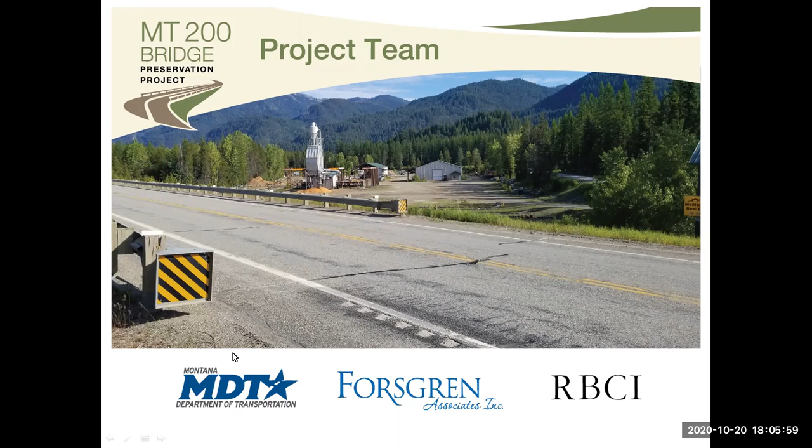All right, hearing nothing, I will move on to a little bit of an overview about the project.

MDT on this project is evaluating the bridge on Montana 200 that goes over the Montana Rail Link about 2 miles south of Noxon. This bridge was constructed in 1957 and is in need of some repairs and routine upkeep.

MDT tries to keep the best return we can on our investments. This is kind of like the 100,000 mile checkup, if you will, on your car. We're going to do some needed maintenance. It's heavy maintenance, if you will, but we can still retain a huge portion of the value of that bridge.

This project is going to be tied with 11 other projects on Highway 37 in the Libby to Eureka corridor. The reason we're tying these projects together is we see some benefits. There's reduced costs due to economy of scale, and reduced costs in administration of the contract. We save costs in mobilization. Also, we have some consistency in construction this way, having one crew come in that has been doing the same type of work in other areas, so we see benefits that way. It'll also allow us to complete construction a little quicker.

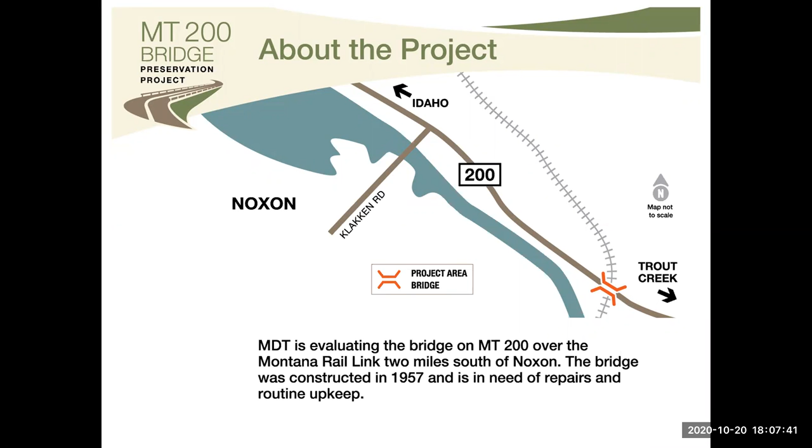So to get into more of the nuts and bolts of the project, I'll turn it over to Andy. Thanks, Bob. This is Andy Collison again.

I'm going to quickly walk through the project's process and anticipated schedule. It was decided to organize the project schedule and process into a two-phase approach: an evaluation phase and a design phase. The evaluation stage started earlier this year and included office and field evaluations of each bridge. All the information from the evaluations was carefully considered to develop repair and rehabilitation needs and was documented in a draft bridge report. The intent of this public meeting is to share the findings and recommendations in the draft report with the public and request public comments.

The next step will be to finalize the bridge evaluation report. In the final report, there'll be a section that documents public comments from today and discusses any items that MDT should consider during the design process.

The design phase is anticipated to start in the beginning of 2021 and is anticipated to be completed later that year. In the design phase, the construction plans will be developed. The design phase will also include an opportunity for the public to comment prior to final design.

The current schedule suggests that the earliest that construction could occur is in 2022. However, the funding for this project is not available in 2022, so construction will likely occur sometime after that, once funding becomes available.

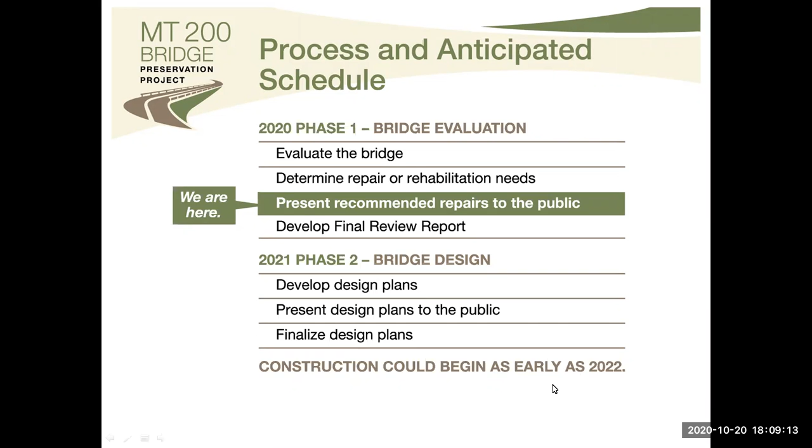Okay, while I still have the stage, I also wanted to touch briefly on MDT's Bridge Bureau's organization and the services we provide. The MDT Bridge Bureau is tasked with keeping Montana's bridges safe, resilient, economical, and reliable.

Similar to this project's two-phase development approach, the Bridge Bureau is organized into two sections, the Bridge Management section and the Bridge Design section. MDT's Bridge Management section provides condition inspection and load rating evaluation for the 5,000 plus bridges across the state. The Bridge Management section also evaluates and analyzes overweight permit loads and performs bridge maintenance on state-owned bridges.

MDT's Bridge Design section provides design and engineering management on bridge replacement, rehabilitation, and preservation projects. The Bridge Design section also establishes and maintains design criteria and standards, participates in research projects, and promotes design initiatives to improve bridge performance and value. Thanks for letting me speak a little here today, and I'll now hand it over to Brent.

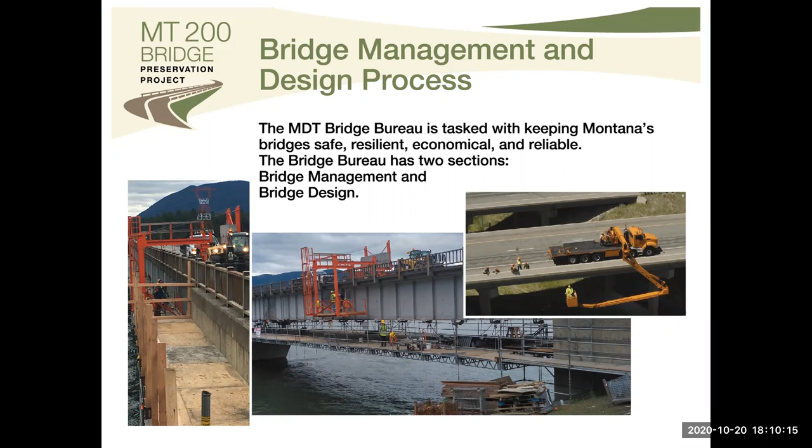Thanks, Andy. Hello everyone, my name is Brent Schiller, and as I said earlier, I am Forsgren Associates Project Manager. Our firm was tasked with performing a field visit to this bridge on Montana 200, reviewing field data along with data from MDT, and then determining whether the bridge needed a deck replacement or a patch and overlay type of repair.

We are then tasked to prepare the plans package for the work to be done by a contractor. As part of the field work, our team not only looked at the bridge, but the needed traffic control to perform the repair work, the potential environmental impacts, and if guardrail at the bridge ends needs to be repaired or replaced.

So I want to describe the work involved with the two main repair types I just mentioned, deck replacement or patch and overlay. A patch and overlay type of repair involves removing unsound concrete, or concrete that is saturated with high levels of de-icing salt which will eventually cause deterioration. We then patch needed areas and provide a concrete overlay on the entire deck. A deck replacement is just how it sounds, a complete removal of the bridge deck and then replacing it with a new reinforced concrete deck.

So at this point, we have performed the field visits and prepared a draft report that MDT is reviewing, and we are anticipating this bridge will need a full deck replacement.

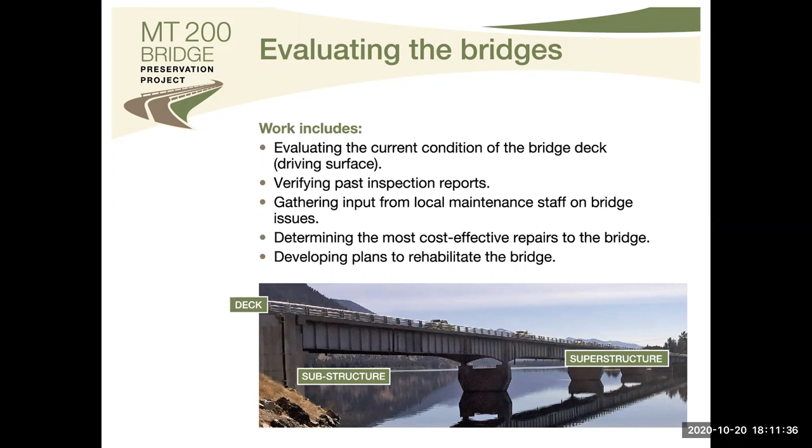So look at the next slide here. We anticipate that work for this deck replacement will be performed one half at a time. Work will occur in one half while traffic uses the other half, with traffic control in place to regulate traffic across the bridge. Our traffic control engineer, Adam Bass, will discuss the traffic control in just a few minutes.

While we were out there, our field crew performed a sounding test on the deck. It's called chaining, which indicated the deck surface to be 77% delaminated, or in other words, three quarters of the deck is delaminated. Delaminated means the concrete is separating from the reinforcing steel, likely due to rusting of the reinforcing steel. The rust expands, causes the concrete to separate, and eventually break up.

Taking all this information together, we've concluded this deck is in a severe state of deterioration and is in need of more extensive work than could be provided by a patch and overlay. The high amount of delamination, along with the need of constant maintenance, makes this a good candidate for a full deck replacement. Since we'll be removing the entire deck, the existing bridge railing will be removed along with it, and the new deck will have a bridge railing that meets current safety standards.

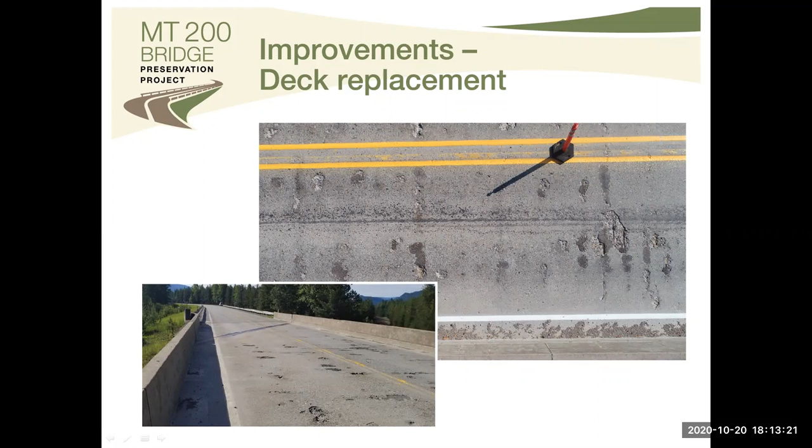Thank you, Brent. I'm Adam Bass with Forsgren Associates, and I was involved with the traffic control layout for the bridge. The project team anticipates that traffic during construction for the bridge will be controlled using a two-way single lane traffic configuration that will close one lane at a time, as Brent discussed earlier. This will allow vehicles to use one lane while construction operations are conducted within the other lane.

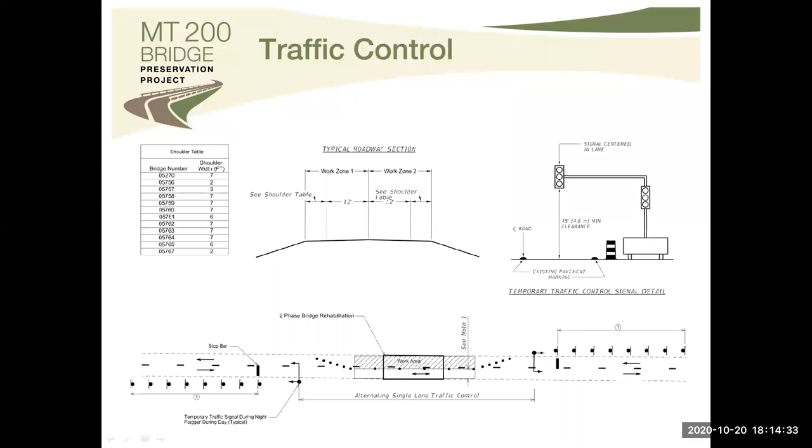And so with that, I'd like to pass it over to Pat Wickman, who will talk about environmental considerations for the project. Thank you, Adam. Hello, everyone. As Adam mentioned, I'll be talking about environmental considerations.

As part of all MDT construction projects, MDT is required to prepare an environmental study to document the effects of the action, or in this case the project, on the social, economic, and natural environment. Guidance and rules for this come under the Montana Environmental Policy Act, MEPA for short, and the National Environmental Policy Act, NEPA for short. When there are federal funds, the Federal Highway Administration requires NEPA compliance, which may be the case for this project. The size and scope of those effects, that is the significance of impact from the proposed action, dictate the type and magnitude of the environmental document that is prepared.

So for this bridge project, MDT has had Forest Grant conduct a site investigation to look for potential environmental concerns and document the environmental baseline at the site. At the bridge site, we looked at nearby wetlands, bird nests on the bridge, potential for environmental contamination, oil spills, etc., the ability for wildlife to cross under the bridge, and potential staging area locations. This information is summarized in the draft bridge report that will be released later by MDT.

Our review showed that the bridge had no concerns serious enough for us to not assume that the project could be reviewed and permitted with an environmental study known as a categorical exclusion, or CatEx for short. These have no significant impacts from proposed projects and do not require MDT to analyze alternatives to the proposed action. So future steps will be for MDT to prepare the CatEx document, which will also include documentation of the public outreach process.

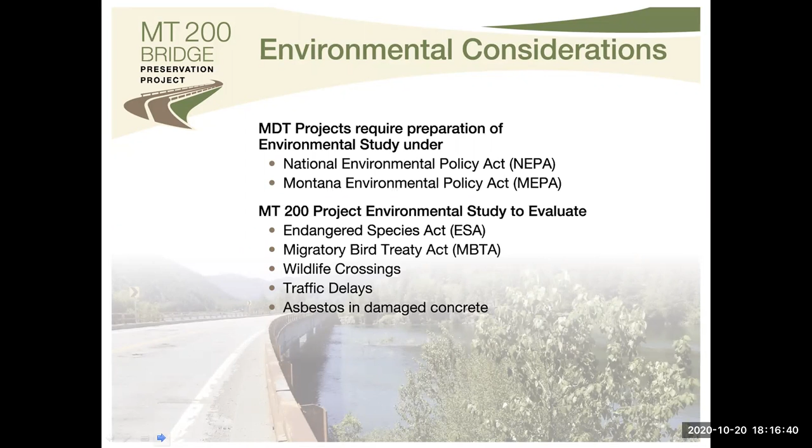Thank you, Pat. Public input collected as part of this online open house and through the online survey, as well as the continued environmental and design analysis, will be considered in the development of the design and planning for construction. MDT plans to hold in-person public meetings if and when possible in the future to share information about the project and to gather information from the public that will help in the development of the construction plans.

The next public meeting is planned for 2021. Construction could begin as early as 2022, as Andy talked about. It is depending on funding availability, however.

MDT is planning to use a variety of methods to communicate with the public throughout the design and construction of the project. Some of those methods include online meetings like this one today, in-person meetings, mailers and postcards, news media, social media, email and text messages, especially during construction, and updates to the project website.

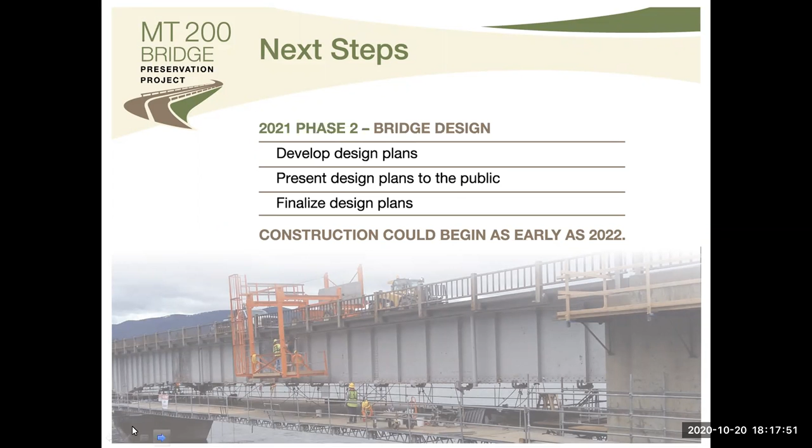MDT posted a survey on the project website to gather more comments about the improvements. If you have friends or neighbors that were not able to participate in the online meeting, you can direct them to the project website where they can view a recording of the presentation and take the online survey. The survey includes questions about how to best communicate project information with you now and during construction. Please submit your survey by November 1st.

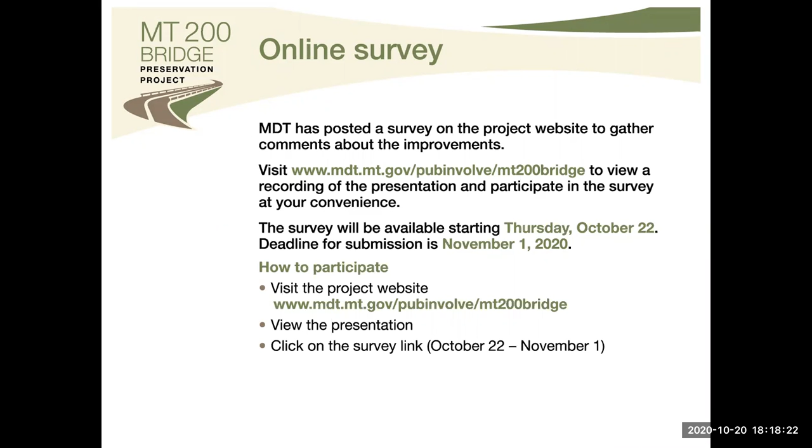I'd like to again thank you for participating in the development of the project. Keeping the public informed throughout the project is a priority for MDT. If you have any questions or comments at any time, please feel free to contact me. Again, I am Brandon Coates. I'm the Public Involvement Manager with RBCI, and my email is brandon@rbci.net.

And with that, that concludes the presentation portion of our public meeting. And I will turn to Kate to see if we have any questions.

Hey Brandon, this is Bob, and I want to interject one thing just to make it abundantly clear to anybody watching or listening to our presentation: the bridge deck as it currently is, is completely safe. MDT has a bridge inspection process. We are constantly inspecting and monitoring our bridge for safety, and there are no concerns with the general safety of this bridge. The discussion of the delaminating concrete is at this point mainly surface level. So again, I just want to stress that the bridge is safe for continued use, and we will continue to monitor it as we have been. Thanks, Brandon. Thank you, Bob.

Kate, have we had any questions come in? No, Brandon, we don't have any questions at this time.